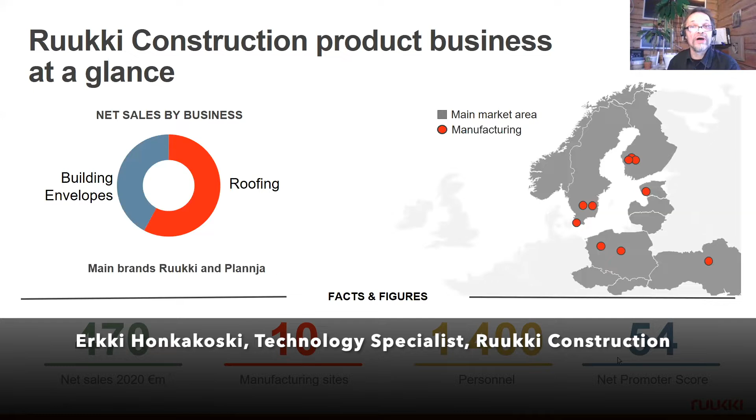So Ruukki Construction product business at a glance is shown here. We have two business units: one is roofing business, and the other, which I'm representing here, is the building envelopes. Main brands are Ruukki and Plannja.

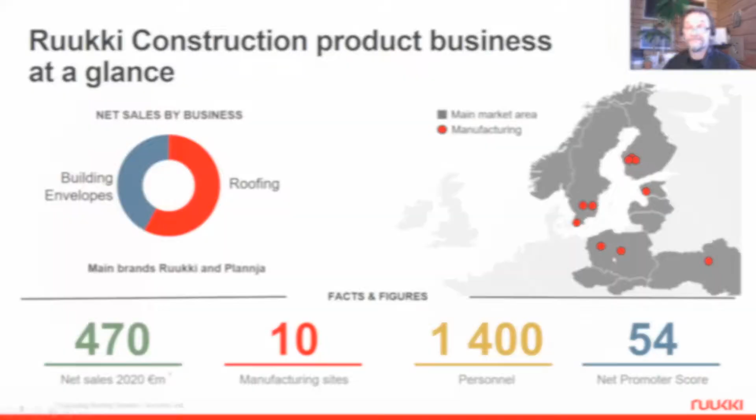Here are the main market areas on the map and the manufacturing sites that Ruukki Construction has. We serve customers in many fields and cooperate with several stakeholders.

On the roofing side, there are these main products: roofing sheets, material for tinsmith roofing, RWS for rainwater systems, roof safety products, and different types of flashings to finalize the roofs. These are mainly for single-family houses.

This is a business for customers in multi-family houses, and also for commercial buildings.

Then we have the building envelope side. We have products like sandwich panels for walls and roofs, load-bearing sheets for roofs, design profiles and facades, for example solar facades. These are products for logistics centers, commercial, industrial and office buildings, sports halls and stadiums.

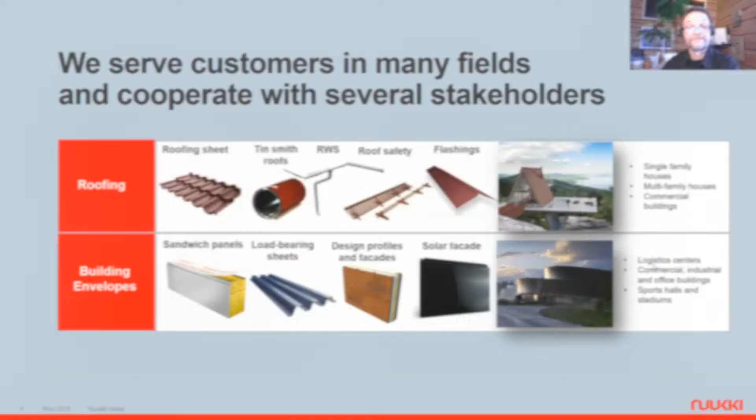So this is single-family houses or renovation projects, more or less. I'm actually sitting in a house like this at the moment.

It has been built most likely 120 years ago. Nowadays it has a steel roof, and it's based on wooden logs. It was very important at that time to have this type of recycling going on - the wooden logs were used from the other building before this one.

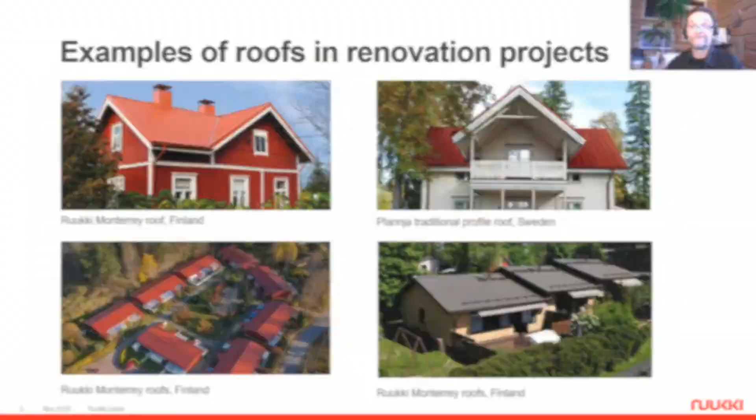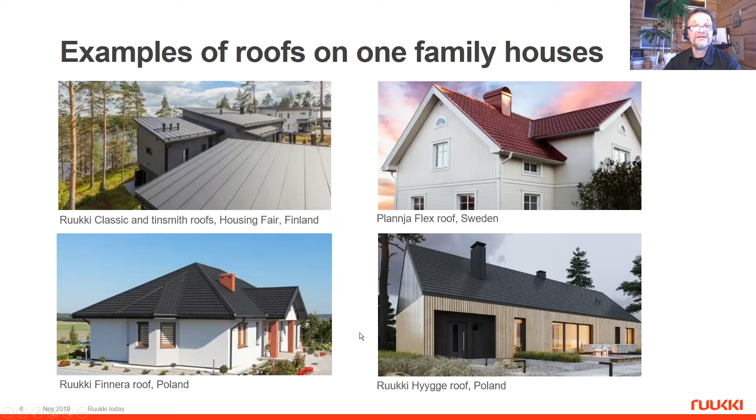Next, newer single-family houses - examples of these are different in different countries and different tastes. And roofs for commercial buildings - examples include tinsmith roofs and ready-made roof plates and so on.

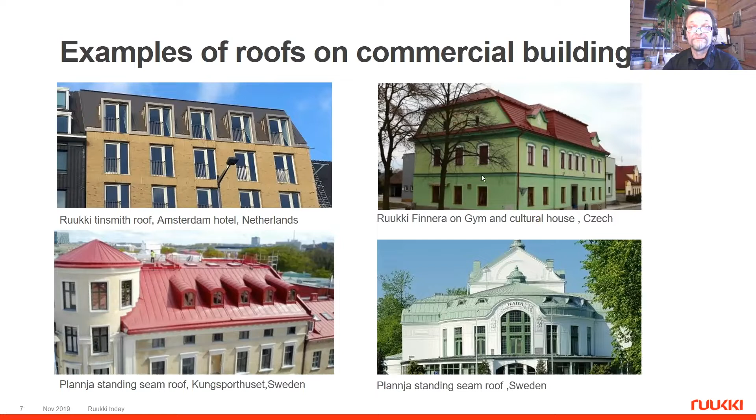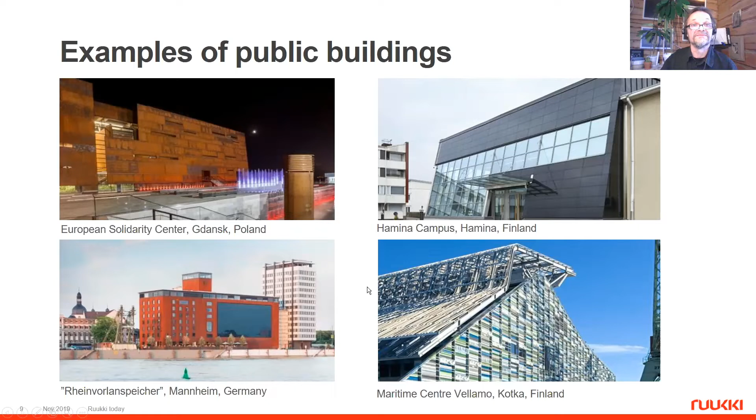Examples of commercial buildings like shopping malls and the like.

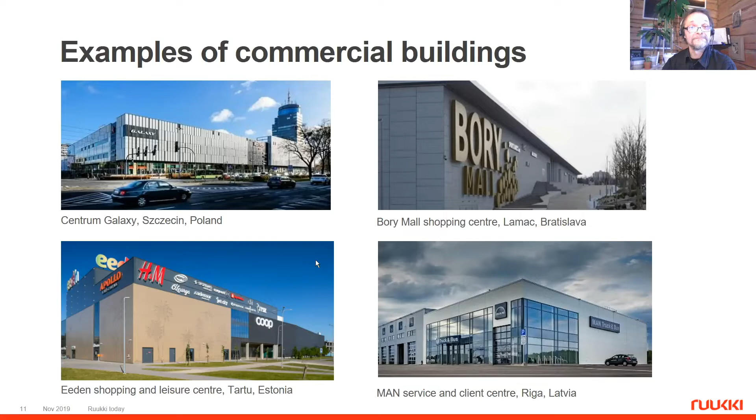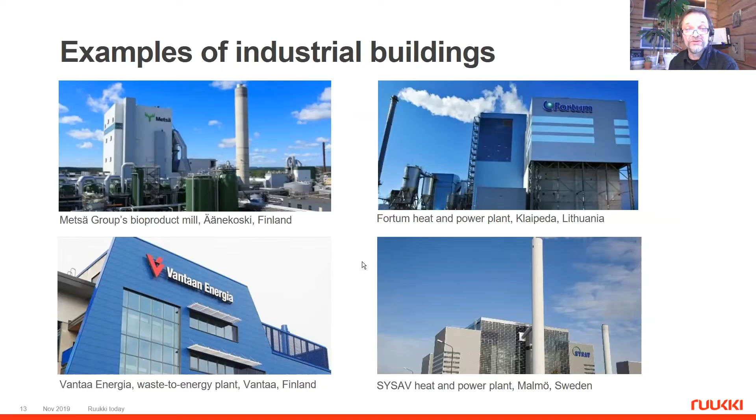Then there are examples of industrial buildings where our products are also used. So we are talking about steel - how we achieve carbon neutral building products.

Steel is 100% recyclable, and it's the most recycled material in the world. I think at the moment about 95% of steel is recycled already. The material, after we have put energy into it, is recycled and can be used over and over again. So we manufacture light and long-lasting products with guarantees up to 50 years.

In a harsh environment, if the environment is less harsh, it will last longer. Then the carbon neutrality also comes from energy savings of the building - Ruukki building envelope solutions provide up to 30% energy savings, like air tightness packages and so on.

Then the next big thing is that the first building products based on fossil-free steel are quite close - it's 2026 by design, and this is quite a new thing.

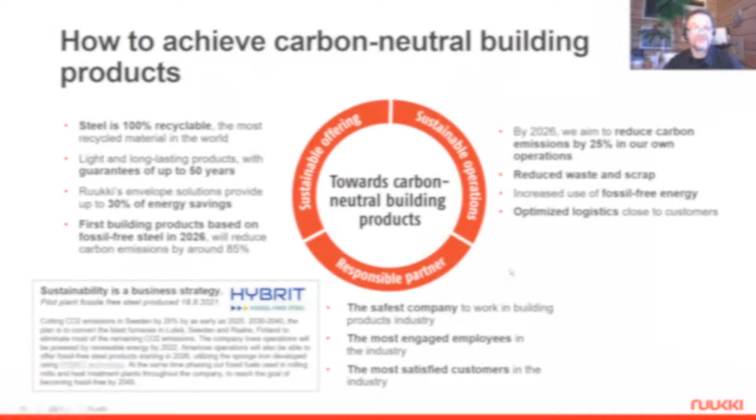Now we are talking about intelligence in building. Our approach is first to look more at the component intelligence - this type of passive things. So our products are light and long-lasting, reusable and recyclable.

There's lots of information included: testing, suitability for the usage, material traceability, etc.

Also the intelligence in operation, so there is optimized logistics close to the customers. The company is the safest company in the field and the most engaged employees in the industry, and also the customers are satisfied. We are reducing waste and scrap in our operations, and we try for reduction of fossil fuel.

So sustainability is a business model. It's not this type of we look in the future, and we see that as a way and as a business model. So building envelope intelligence is something that is more than a building component. It's a design of whole, and it gives more than a single product can achieve. And the components are enablers for this building envelope intelligence.

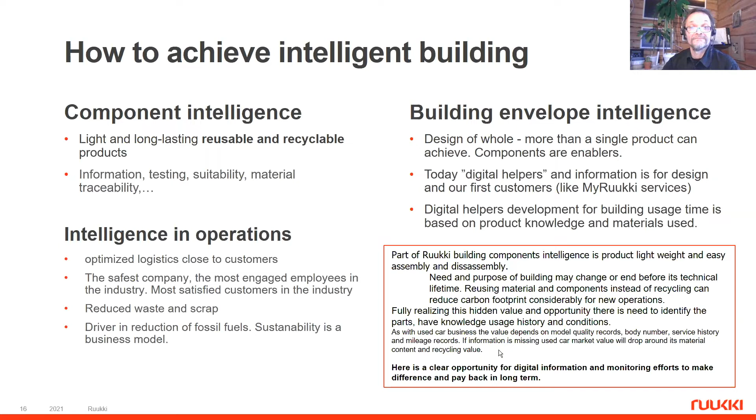So here is Ruukki's process and digital services today, and there is an emphasis on the early life cycle of the building. So the capital phase, design, tendering and ordering phase, we use a lot of information and digital information. And on the construction phase, we are using this type of instructions and information to make it as smooth as possible, like a delivery process and instructions on how to build the building and so on.

After that, there is the commissioning phase, how the building is really going to work there. There's a warranty period of 10 years, and this is for design and our manufacturing defects or that type of things. So our responsibility ends here.

So the warranty period is quite long, but still, hopefully the buildings are lasting more than 10 years. So then there could be accidents or a need to renew or retrofit the building. Maybe the building is sold and it needs a new looking facade or something like that.

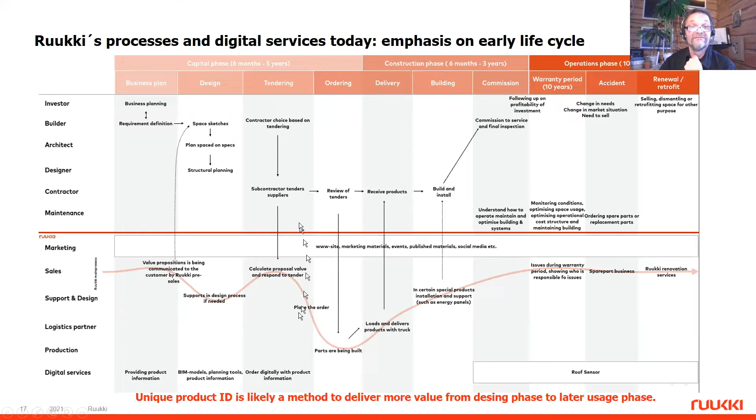So there's dimensioning software, simulations like optimized energy simulations, BIM models, manufacturing information, delivery and logistics information, assembly instructions, and so on and so on. Some of them are in MyRuukki services.

So data from ready-made buildings, so local weather and building automation systems are main sources, of course, and additional measurements are added if needed. From Ruukki side, there's available for load-bearing roofs, Ruukki roof sensor.

And this is to measure the snow load over the roof. Sometimes nature is not following the recommended minimum values of the snow load, and in that case, the building owner and the management are responsible for removing that snow. How to know how much snow is there?

So this Ruukki roof sensor measures from the load-bearing sheets how much extra load there is on the roof. So this is like a snow weighing device. It is based on the material knowledge of how the roof is operating, and then the measurement - you don't need to climb on the roof to know how much weight is there.

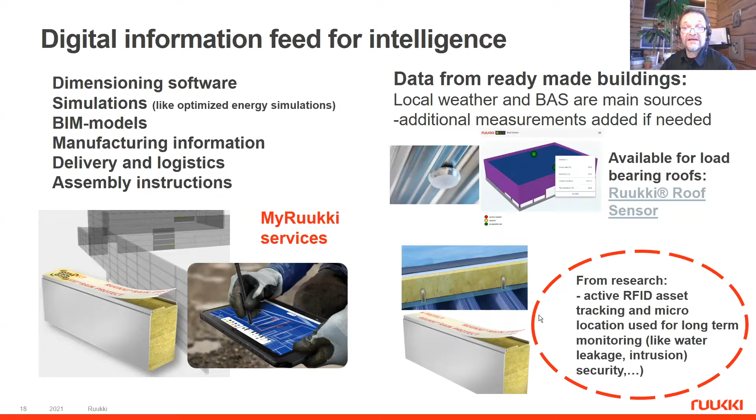This is not available yet, but from our research, this is an active RFID asset tracking and microlocation system that can be used for long-term building monitoring. We can detect water leakage, intrusion, and services like security if needed. It can be used for automated ID because it's active, following asset arrival and inventory location, for example when needed on a building site. And if there's investment in that, we can use it as a contact-free monitoring method for long-term, large areas - leaks, intrusion detection, etc.

Basic operation is as follows: a short radio message is sent and it bounces inside the structure through the insulation materials and so on. It is received by other transceivers in the structure, and the impulse response of this coded signal is analyzed and compared for any changes. So if there's a water leakage, we can detect the water, or any other change in the reflection, or changes in steel structure or coating.

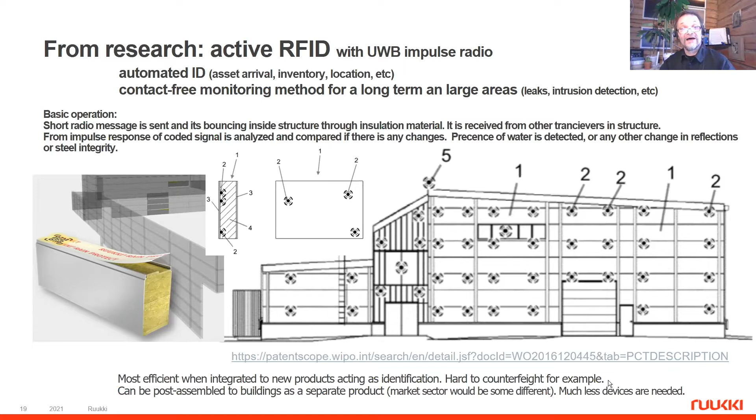This is most efficient when integrated into the new product, acting as identification of the product. It is hard to counterfeit if it's embedded in the product. Of course, this can also be post-assembled to buildings as a separate product, but the market sector would then be different, and much less devices are needed if used as a separate product. We don't have this on the market yet.

I'll show you an example of this in building walls and facades. I didn't have enough time to wait for a real water leakage, so I needed to make it myself. And here is the point - I injected some water inside the wall, and I could immediately detect the water leakage.

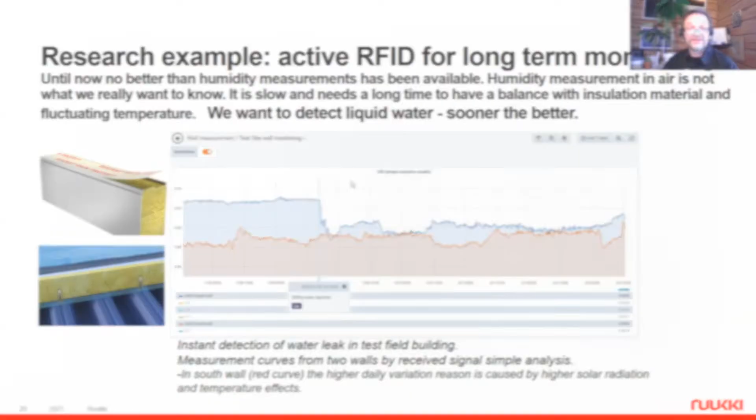This analytics can be adjusted depending on what you really want to detect. Is it building condition? Then you don't need to measure so frequently - maybe even once a week is enough. If you want it as an intrusion detector, then you need measurements every 5 seconds, for example.

We encountered a task where you can build whatever interfaces you need, but for general availability of a digital twin, there's a big question of how to automate the creation of the digital twin from the information silos, and how to update it. So this would be a good thing, and we are moving towards it, but construction companies are not quite ready for this yet.

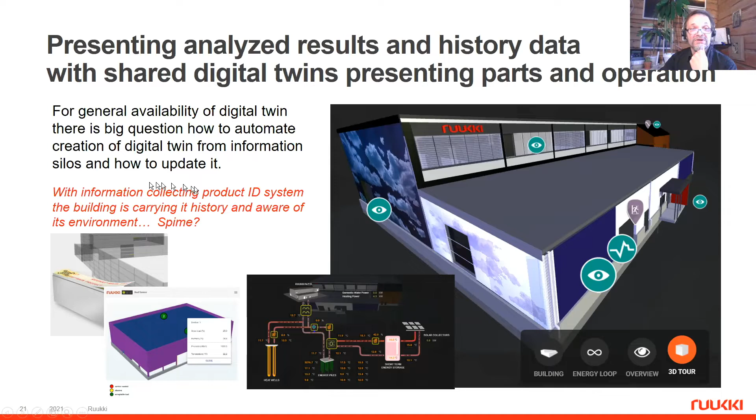As a conclusion, from a research and development point of view, we have lots of data today. Our investments and efforts are mainly made to fulfill our first customer process and interest, of course. There's a lot of data that could be used further along in the building's lifetime, but generally the demanded data and handover is just a snapshot of the delivered and assembled products. Our first customer's interest can be much shorter than the product warranty time or building lifetime.

So the responsibility cycle against the building life cycle - there's a big time difference here. Ruukki sees some interest of our own and value in the data for monitoring building usage time, like communication through intelligent products with future building owners and managers, who are likely not our first buying customers - if there are renovation needs, spare parts, etc. This would save time and improve communication, services, and our reaction time on those.

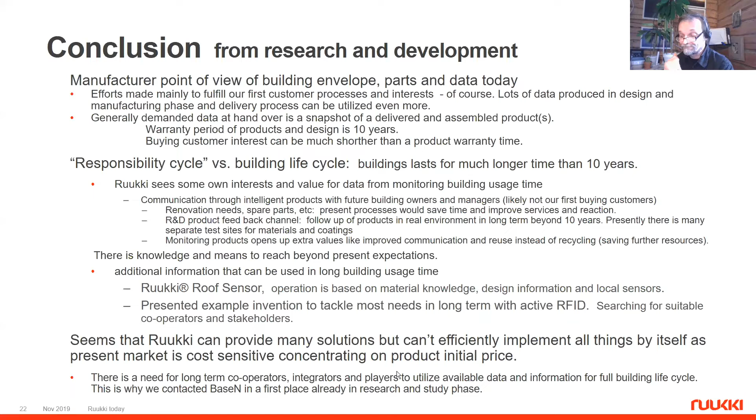So additional information can be used over a long building usage time, like a roof sensor and the presented example invention. It seems that Ruukki can provide many solutions, but technology is not the problem - the business model is more difficult than the technology. So there is a need for long-term cooperation, integration, and players to utilize data for the full building life cycle. That's why we contacted BaseN in the first place, already in the research and study phase. How does technology and digitalization help you create carbon neutral building products?

So the main thing is that we're doing our operations as carbon neutral as possible. This is something that everyone can do. And then the other thing is that we optimize the energy usage of the building and that type of thing. These are the services and extra parts that you can order, and there's a guarantee on that, for example, air tightness of the building envelope. And then the third big thing that is coming is using CO2-free steel in our products.

How much does your customer get to know about the raw materials used in the roof or envelope itself? Our customers are very well aware. Our customers are many times building constructors, and they are looking at different manufacturers and selecting what is most suitable for them. That is our first customer many times, and the selection comes from there. So all the building materials in the world are there on the line, selected by our first customers. So they know that really well.